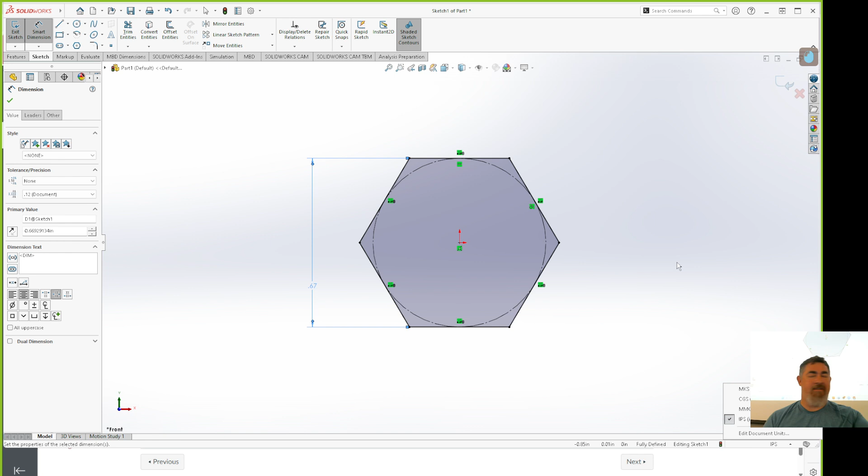I'm going to finish, and I'm going to tell it to be mid-plane, and 12.5 millimeters, right? Say OK. And I'll extrude, click there, draw a circle.

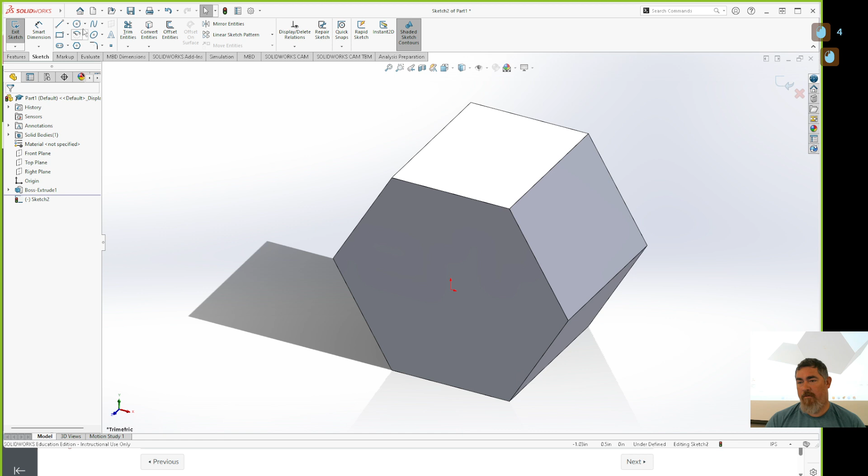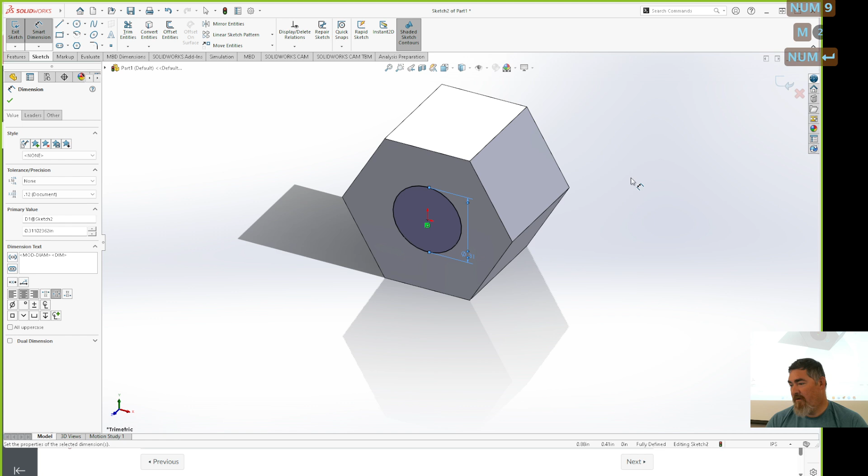Finish and extrude it 5 millimeters. So you can see even without, and I don't want it mid-plane, I want it blind. So even without changing the units, I can still tell it to be millimeters. But now I might as well change it to metric. Now I'm done drawing it.

Then I'll go to mirror, like before, right? The mirror face. So my plane isn't here, but if I go here, you can see that it kind of expands my history there. And now I can pick the plane that's going down the middle of the part. It can ask me for a secondary mirror plane, because you can kind of mirror across two different things if you want. I've never actually used that option.

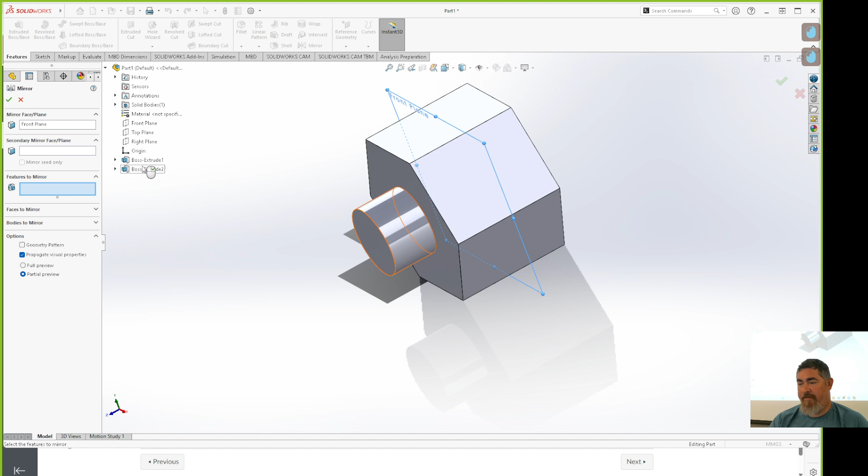And now it asks me what I want to mirror. So I want to pick features to mirror, pick that feature there, say OK. And there's my thing. I'm going to go into my hole wizard.

Yeah. I thought you said in Fusion.

So in SolidWorks, we're not just going to copy the component. We don't have to like move the body of the component. We're just going to copy this whole file and make a change to the file after we're done with it.

So I'm going to go in here, screw clearance for ANSI metric, screw clearance. Oh, that was for whatever it was. Oh, it was just a standard size, but we are going to make that for 3/8, so I'm just going to tell it to be clearance for 3/8, since that's what I'm putting through it anyway, making my own version.

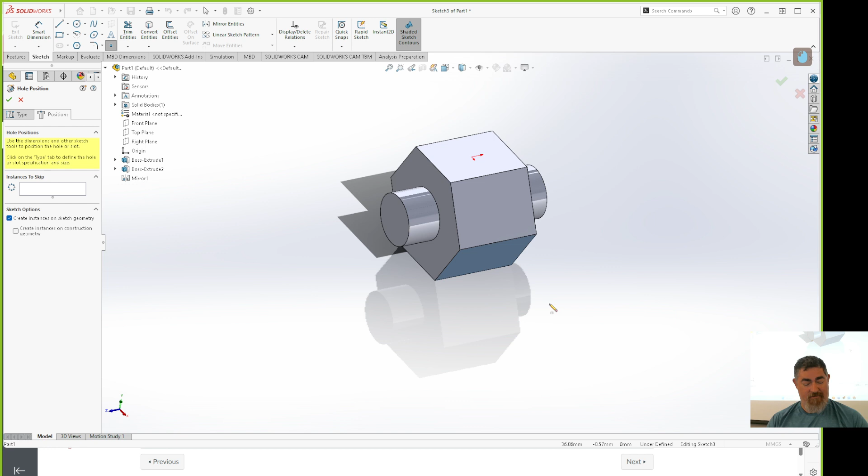Go to positions, pick on the face I want to draw on. Oh, look, my origin is right there at the center of my part. Because remember, I started my sketch on the center of the part, drew it out, extruded mid-plane, so my origin is still right there.

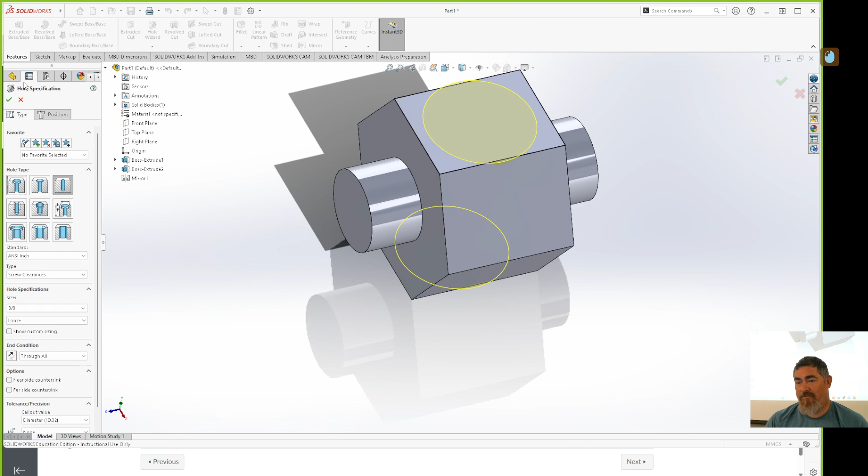So I can just snap right to there. I don't have to do anything centered on the face. Go back to type and say OK. And there's my hole. So now I save my part.

And I probably should have made my folder. So new folder.

You do want to make sure it's named correctly. Once you start putting things together, you can't change the names of files, because it's going to reference this file in this new file for the assembly. And if you change the name of that file, then it's going to be like, hey, I can't find that.

So then you have to reassociate and everything. So try and figure out what you want to call things before you start saving things, or at least before you start making your assembly. Because once you make your assembly and start putting stuff into that, now it's locked down.

Same thing when you make a drawing. The drawing calls from the part files. So if you change the name of a part later on in a project, you have to go back and relink it everywhere, and it can be a pain.

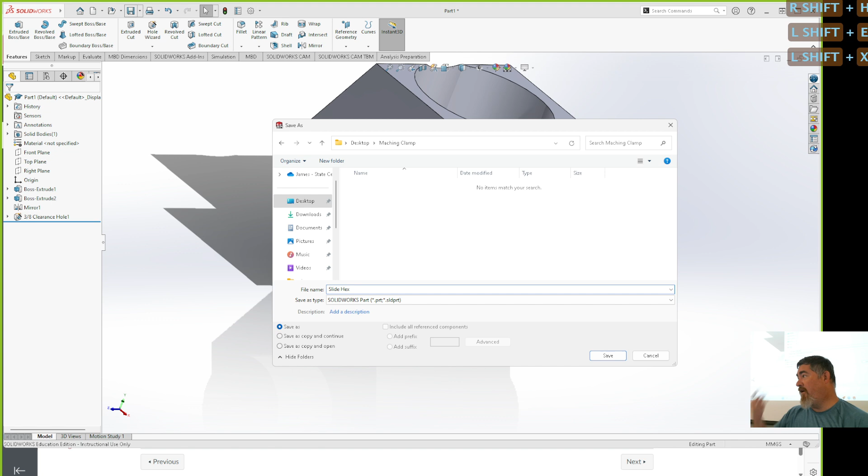So I'm gonna just call this... is that a good description of what this part is? Not really. I'm gonna call this slide hex. That's what I'm gonna call it. This is the slide hex. This is the hex that slides along through.

So I'm gonna save that. And I'm gonna close this file. Done, it's closed. Now I'm gonna go back to here.

So in my computer, or this PC, or whatever they call it now, Windows Explorer is the old name. I'm gonna go find that file, and then I'm just gonna make a copy of it. So I just held Control and dragged it, or I get Control C, Control V, however you want, and it makes a copy. Now I'm gonna rename this to be

bar hex. So that's the hex that holds the bar, right? Now I'm just gonna drag that into SolidWorks to open it.

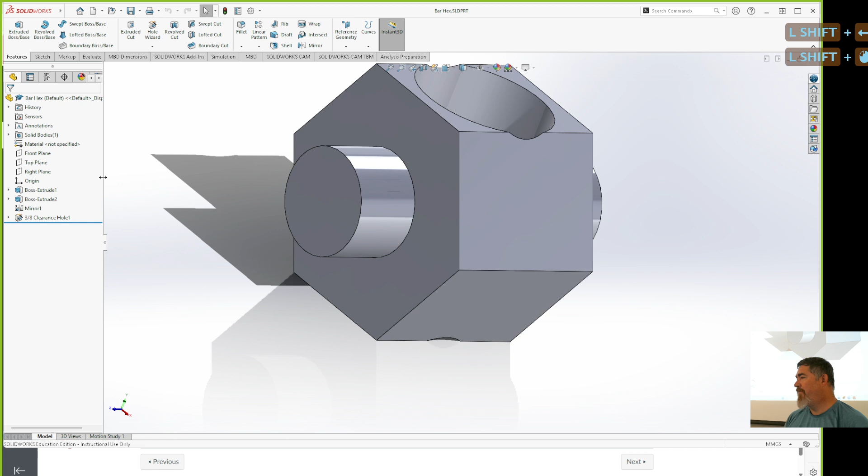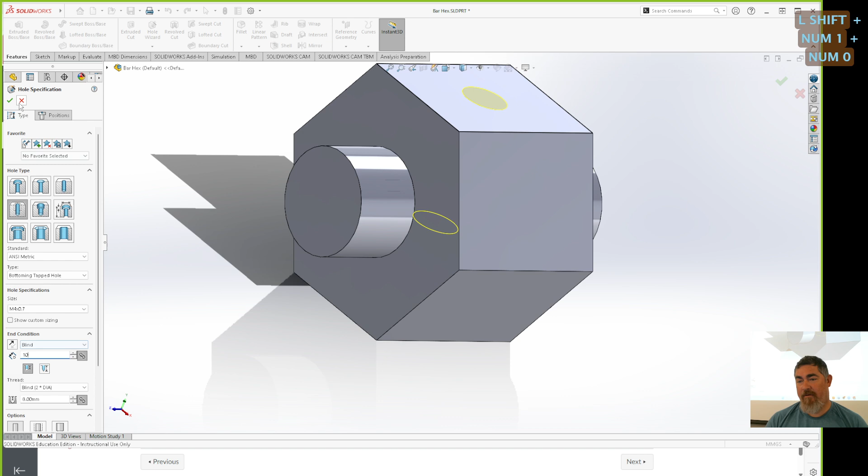So we'll click on the hole, or here, edit feature, and change that to be a threaded hole, metric, M4, not through all, it's gonna be blind, and it's gonna go whatever it was. Say okay, and there's my hole.

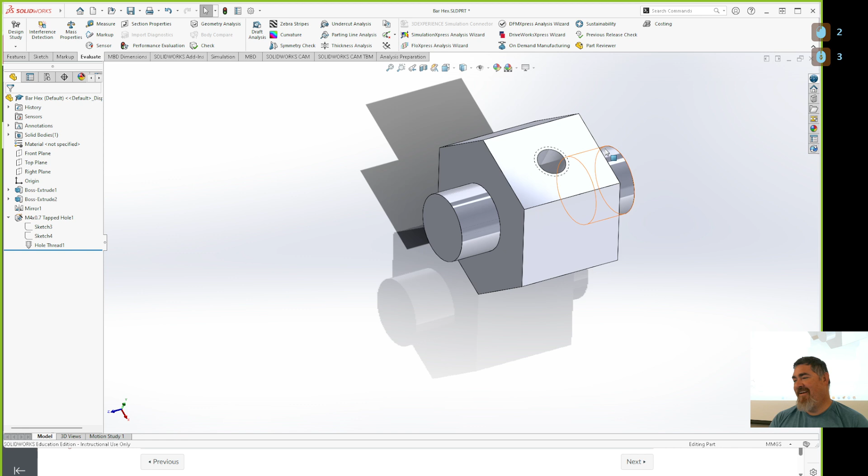So that little hidden line, that's your thread. It doesn't, for as much as it likes to be shiny and stuff, for threads it doesn't show you the threaded view, it shows you that. Don't worry about it, it works. When I make the drawing, eventually it'll have the thread.

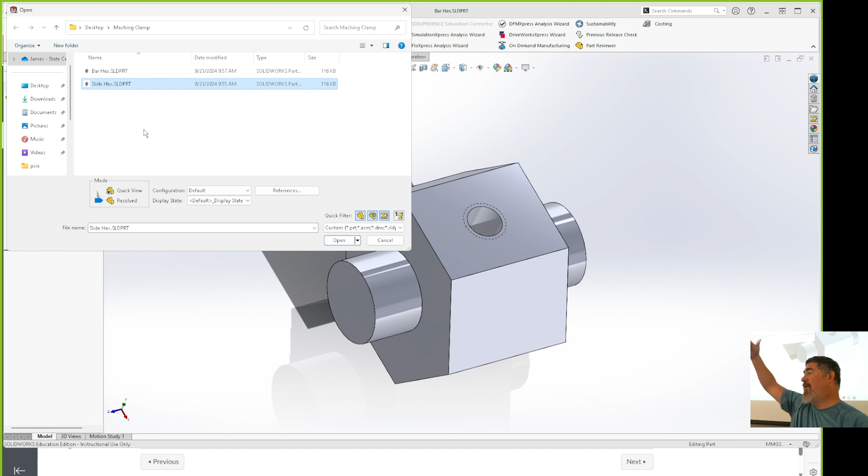So I can save that, and now when I look at my files, I have the bar hex and I have the slide hex. So make one part, copy it, then make your changes to it. Okay? Does that make sense? All right.